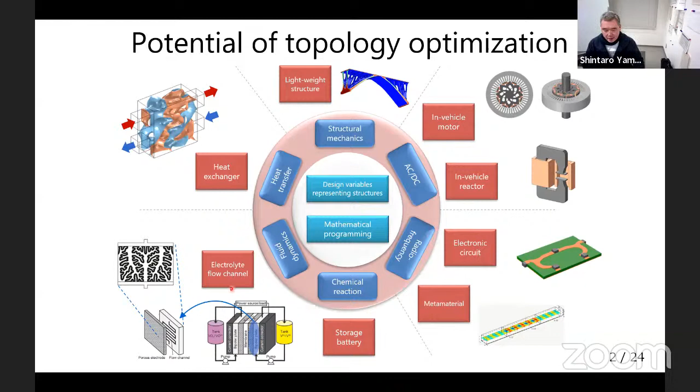My research is closely related to topology optimization. As you well know, topology optimization is a structural design methodology which can optimize both shape and topology with a high degree of design freedom. Because of the potential for generating high-performance structures, topology optimization is widely applied to various engineering problems as shown in this slide. For example, structural mechanics, low-frequency electromagnetics, high-frequency electromagnetics, chemical reaction, fluid dynamics, heat transfer, and so on.

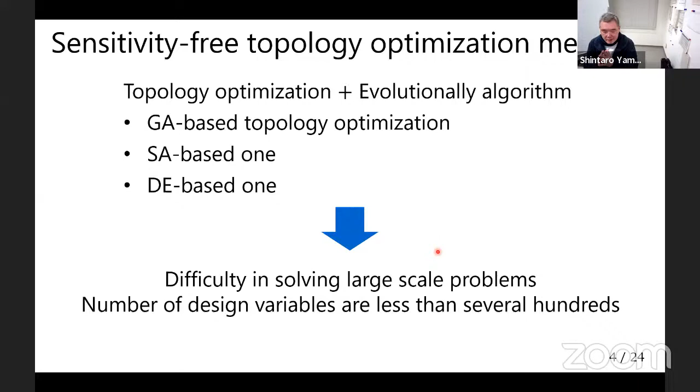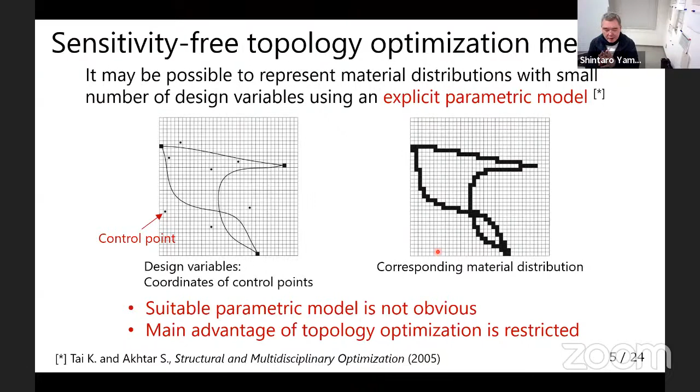There already exist some sensitivity-free topology optimization methods. Typically, evolutionary algorithms are incorporated into topology optimization. However, such methods have difficulty in solving large-scale problems. The number of design variables is usually less than several hundred. Of course, it may be possible to represent material distributions with a small number of design variables, incorporating an explicit parametric model. However, a suitable parametric model is not always obvious, and the main advantage of topology optimization, that is, high flexibility for representing material distributions, is restricted.

Therefore, the following 3 points are needed for strongly nonlinear problems. First, the sensitivity-free nature. Second, a small number of design variables. Third, a large degree of freedom for structural representation. These requirements seem to be contradictory. To satisfy all of the 3 points, I here propose a new structural design methodology called data-driven topology design. The key idea is utilizing a deep generative model.

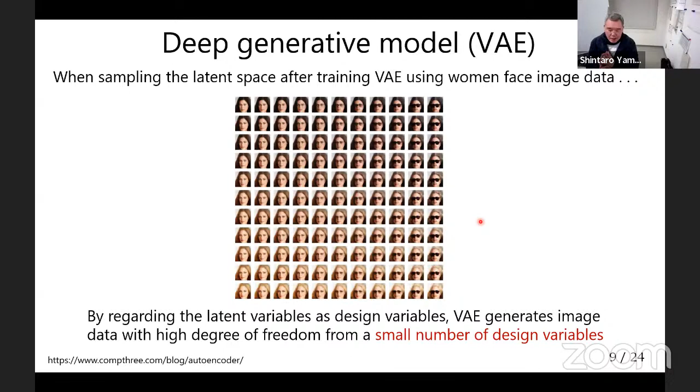Similarly, if I train a VAE using women's face image data, these images are generated by sampling the latent space. By regarding the latent variables as design variables, the VAE generates image data with a high degree of freedom from a small number of design variables.

Data-driven topology design has 3 important points. First, material distributions can be generated by random sampling in acceptable computational cost because the latent space is low-dimensional. Second, material distributions can be generated with large degree of freedoms, which are diverse and inherit features of training data. Third, it will be difficult to construct an explicit parametric model satisfying the above 2 points. However, such parametric models are implicitly constructed through the training by using deep generative models.

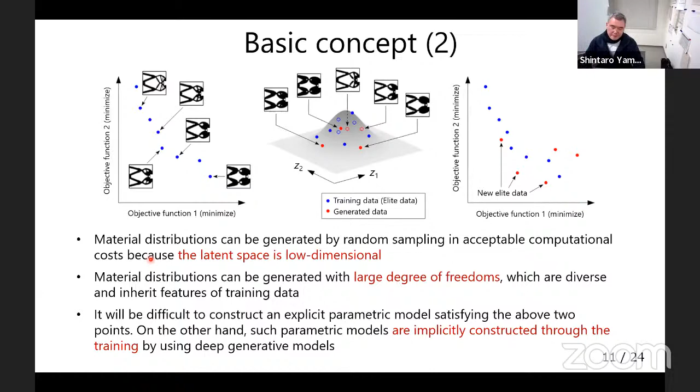In step 5, inversely convert material distributions of the generated data. And in step 6, evaluate performances of the generated data and update the elite data by merging the generated data. And go to step 2 of the next iteration. These steps are iterated until the convergence criteria is satisfied.

Here, it should be noticed that the initial data should be provided according to a certain strategy in data-driven topology design. In many evolutionary algorithms, initial data are provided using a random number generator. However, it cannot be used in data-driven topology design because deep generative models cannot capture meaningful features from randomly generated material distributions. Therefore, I need to provide initial data which are regular in a certain degree.

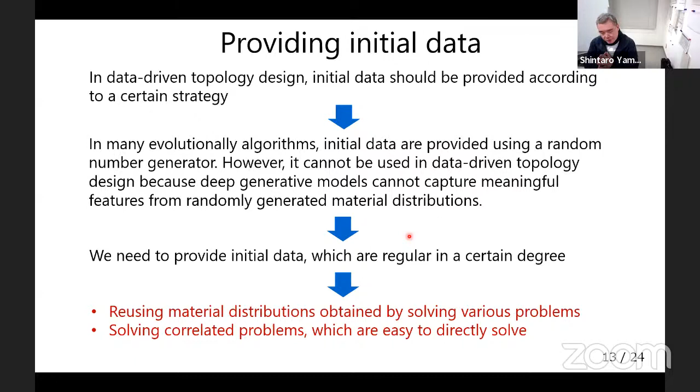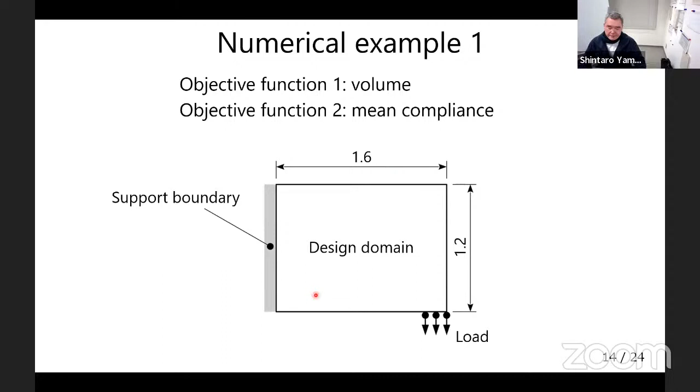Numerical example one is a well-studied mean compliance problem. That is, the objective functions are the volume and mean compliance. The design domain and boundary conditions are given as shown here. To set up the initial data, I construct a database that includes 2,271 material distributions obtained while solving various topology optimization problems. From this database, I select 55 material distributions according to the optimality of the two objective functions. These are material distributions of the initial elite data.

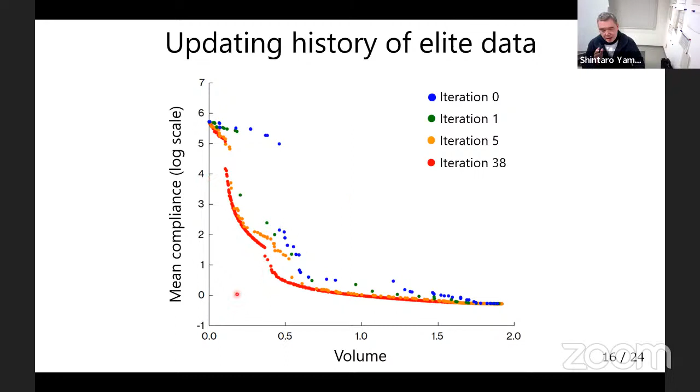Originally, compliant mechanism design problems are difficult to solve because linear strain assumption often fails due to large deformations. That is, the geometric nonlinearity should be taken into account. In addition, the maximum stress should be considered in the real-world design. However, it is usually difficult to solve minimax problems. Therefore, in many studies of topology optimization, the geometric nonlinearity is ignored, and the maximum stress is implicitly controlled by constraining the stiffness to the input load. Thus, the numerical example presented here is a difficult problem when solving with the sensitivity information.

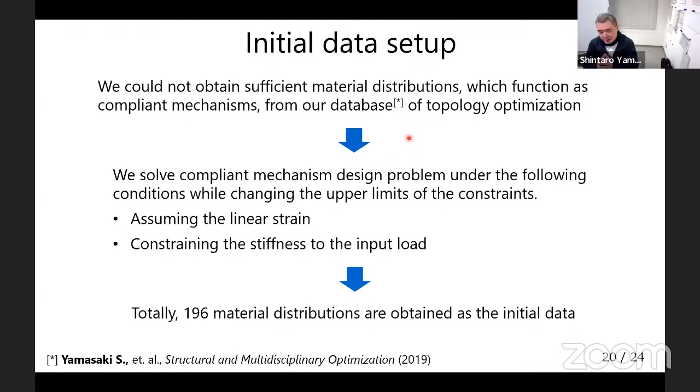Another issue is how to set up the initial data when solving the compliant mechanism design problem using data-driven topology design. In a preliminary study, I couldn't obtain sufficient material distributions which function as compliant mechanisms from my database of topology optimization. Therefore, I solve a compliant mechanism design problem which is simplified by assuming the linear strain and constraining the stiffness to the input load. And by changing the upper limits of the constraints, I obtained 196 material distributions as initial data. And the following 30 material distributions are obtained as initial data according to the optimality of the three objective functions.

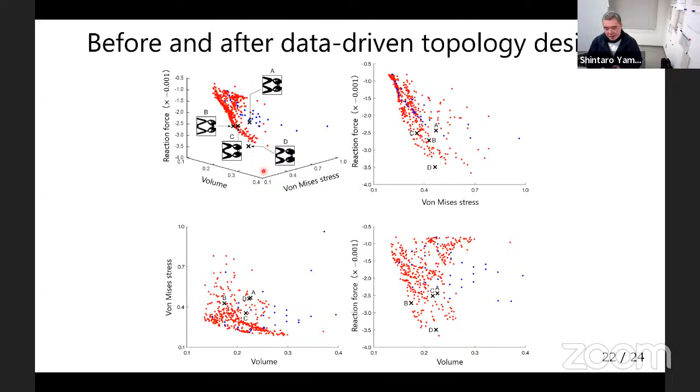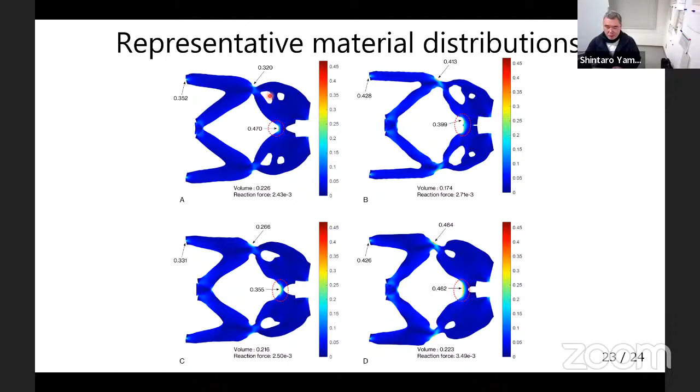As a conclusion, I propose a new structural design methodology called data-driven topology design for solving strongly nonlinear problems. It has the following features. First, material distributions with large degree of freedom are generated from a small number of design variables by using a generative model. Second, data-driven approach is adopted.

That is, training of the deep generative model by elite data and elite data generation by the trained deep generative model are performed iteratively. Third, by incorporating them, the performances of the finally obtained material distributions are drastically improved from initially provided material distributions. Finally, I confirmed usefulness of data-driven topology design through some numerical examples.

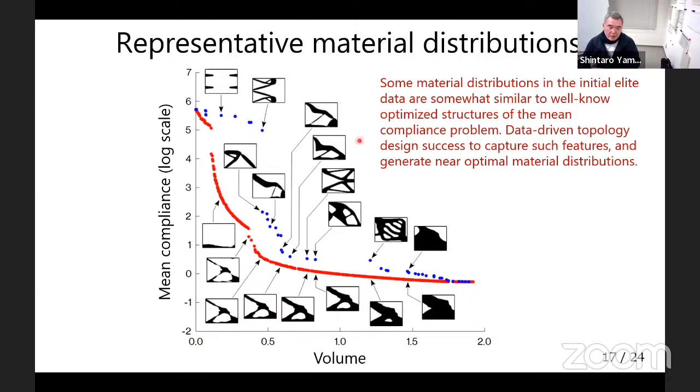Sorry, it is difficult to explain this mapping method precisely. Roughly speaking, I map material distribution in a strange design domain to the regularized domain by using the material distribution mapping method proposed in my previous paper. So please, let's discuss after this session about it.

Okay, thank you very much. So you have a question from Mr. Junji Tutu. What kind of deep learning model was used? Okay, you can give the answer on chat. What kind of deep learning model was used? Thank you for your question.

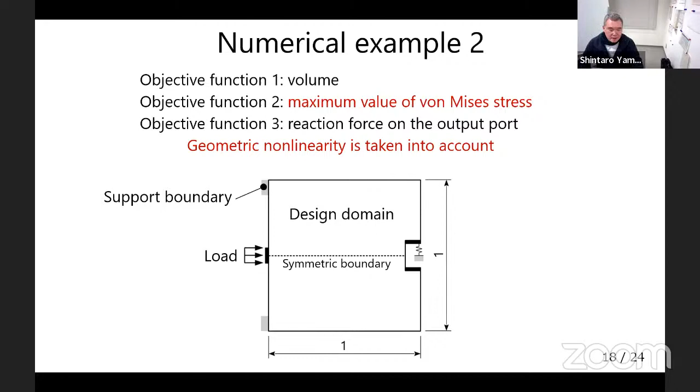I used a variational autoencoder in this presentation. Variational autoencoder is one of the generative models, and it is a type of unsupervised learning, where the data is used as input and output, and it learns and captures the features of training data in latent space.

So, could you understand? Many thanks. I got it. Okay. So if you have time, just send a message to him on chat. It's okay, Shintaro? Yeah, okay, thank you very much. Okay, thank you, Shintaro. So, let's move on to the second presentation.

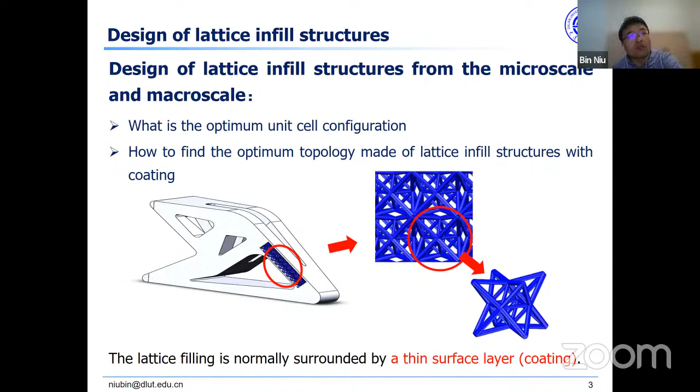So in this work, first we see the homogenization analysis of periodic lattice structures. There are many unit cells. We are not going to do detailed modeling and discrete analysis, as this is computationally costly. So we use equivalent analysis, which is important. We use the homogenization method, but here we use the novel implementation of asymptotic homogenization by Professor Gengdong Cheng. This is very easy, you can use it very simply, and we can get the equivalent properties.

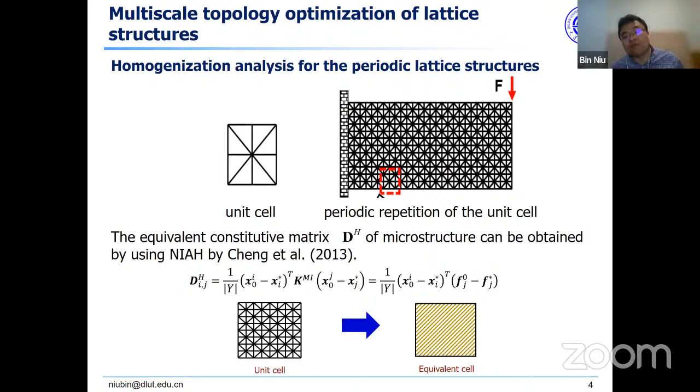Then with these equivalent properties, we can do multi-scale analysis of lattice structures, for static or dynamic analysis. The homogenization method can reduce the computational cost. This is the classical method. Then we continue with our earliest work on PAMP, porous anisotropic material with penalty. Then we can perform two-scale topology optimization, and we can find the optimum microstructures as shown here. We can also find the optimum distribution of this microstructure on the macro scale. We list some references about this. On the micro scale we use the classical method, and on the macro scale this is porous, anisotropic material. Then we can perform this two-scale optimization.

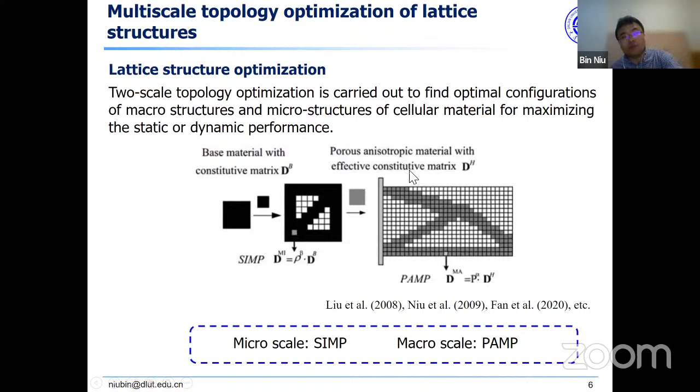And so on. How about this periodic infill with the coating? The coating is shown here. When you introduce the coating, the infill lattice is normally surrounded by a thin shell. So it is very interesting to design such a structure, with uniform microstructures, as I show here, but where the microstructure is coated by a thin shell. So we are going to do this.

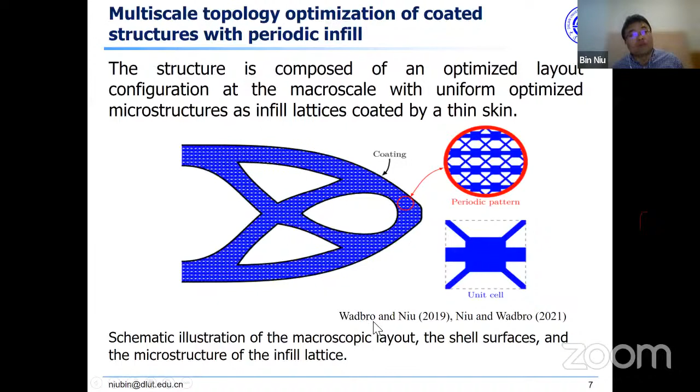Sorry, is there something? The multi-scale topology optimization of the infill lattice is built. From the figure, we can see the optimized macro structures and this optimized periodic microstructures. On the macro scale, together with this lattice field, we can also design the coating. So first of all, how to design the coating? The coating, this boundary coating, you will see varies with the change of the topology.

So therefore, it is very important to identify the coating together with the topological design of the microstructure. So we do it simultaneously. It's not separate. When we design the lattice, we also design this coating. This means we can change the thickness of the coating and the topology of the lattice changes. Then the coating is also changed together with the topology of the microstructures.

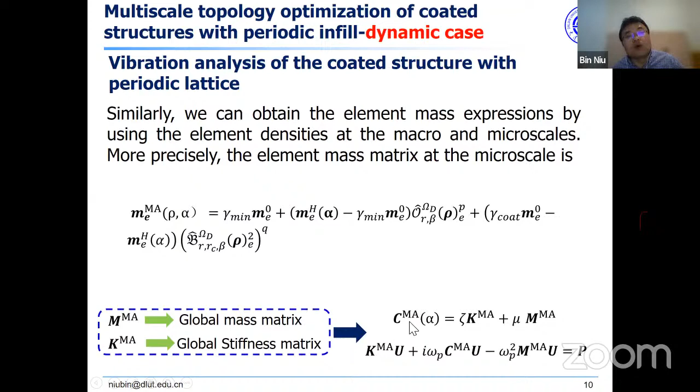Similarly, when we consider the dynamic problem, we can also build the element stiffness and element mass expressions by using the element densities at the macro scale and the micro scale. Furthermore, of course, we can build the dynamic equilibrium equation for the lattice infill structures. Then we use the damping model, Rayleigh damping. So here we are going to build the two-scale optimization formulation for the infill structure with the coating. I just show it here. This is the optimization formulation.

The objective for the static case is the compliance, which will be minimized. We also consider the dynamic compliance. Of course, we introduce some constraints. We have a volume constraint on the micro scale. And we also have a resource cost constraint on the macro scale, because we consider the coating and the lattice. We can assume a different cost for the coating and for the lattice, so we can have a cost constraint here. This is for the densities at the micro scale and the macro scale. As discussed above, we use the close operator to evaluate the material volume fractions on the micro scale.

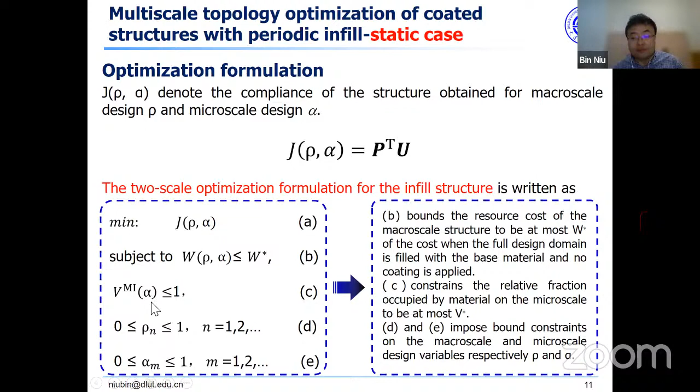This is for the static results. We consider two different problems, with different loads, on the corner and on the center. We call them TC1 and TC2. Let me show you some results. I see we already have 9 minutes. So here are the results, optimized for different thicknesses of the coating. The first row is for the optimized macro structures. And here we show the coatings with different thicknesses. These are 3x3 microstructures. Then this is for the center loading.

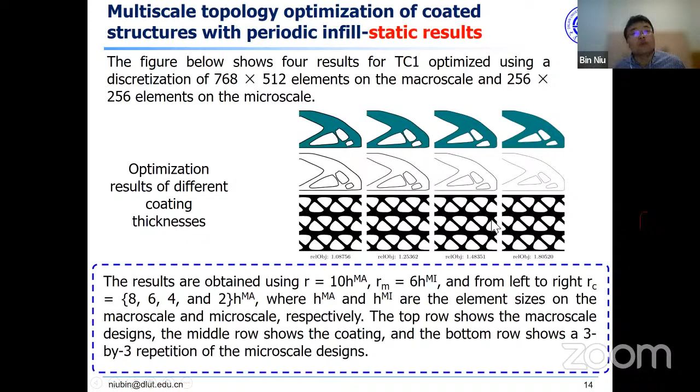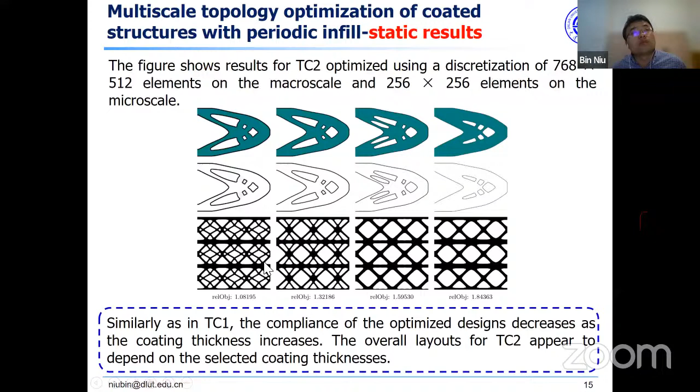Similarly, we have the optimized macro structure, the coating and the different thicknesses. You will see that with different thicknesses, the microstructure could be different. And here are also 3x3 microstructures. This is for the static case. For the dynamic case, we also have two examples. This is the center loading, and this is the MBB beam. We have the load over here.

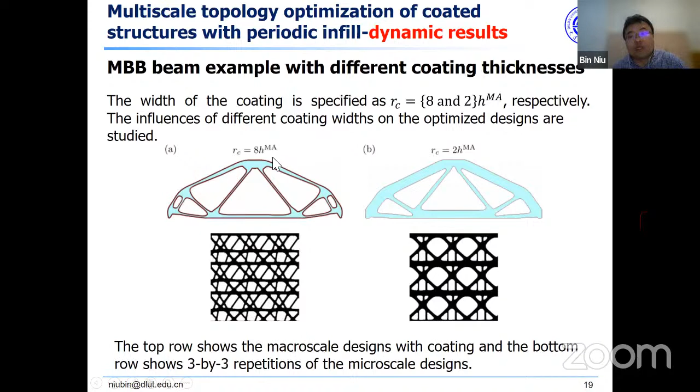So I have a summary of this work. We are working on this multi-scale optimization. We extend our previous work, and we consider coating together with the macro and the micro topologies, and we perform the optimization for the static and dynamic case. Of course, we also have some sensitivity analysis, but I'm not presenting it here due to the time limit.

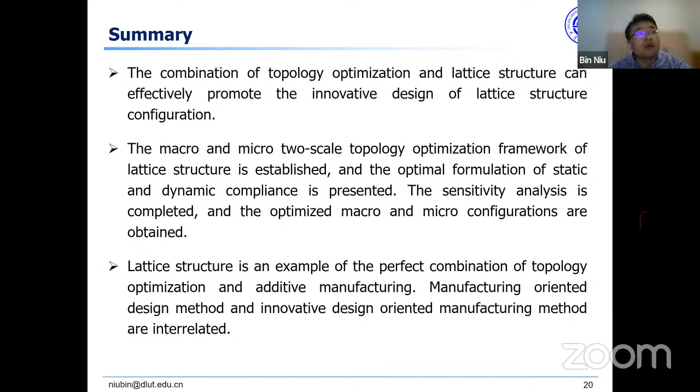So thank you, Bin, for your nice talk. Do you have any questions? Okay, Ole, I could have one. Happy New Year to all of the Chinese very soon. Thank you for your talk, Bin.

I was wondering, when you have the same microstructure everywhere, then it's like optimizing the microstructure for multiple different loading cases. And that would usually result in an almost isotropic microstructure. So looking at all your microstructures, they actually look quite isotropic. So I'm wondering if you have investigated how much different they are from simple isotropic microstructures. Of course, they have a little tendency to be stiffer in the horizontal direction because that's your loading, but really they look isotropic to me, all of them.

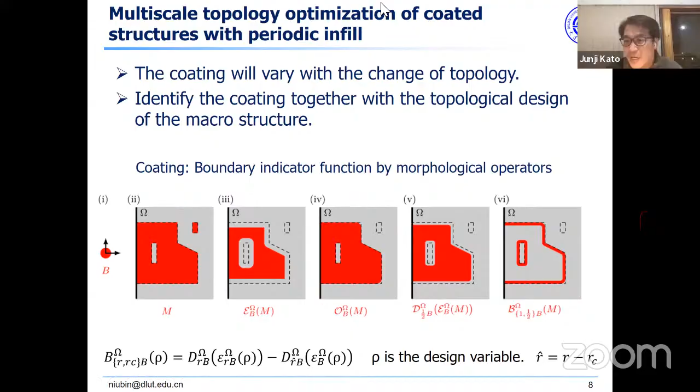Thank you. Or any other question? No question. So I have a simple question. Sorry, I have one simple question. When you apply coating on the surface, mechanically speaking, we will get a so-called confined effect. How do you consider such a very complicated mechanics in your finite element model?

That is my question. What do you say is confined? Confined effect. A wrapping type structure, for example, in a compression test with a wrapped coated structure and infill structure inside, the response is completely different. So the coating surface works very much to resist deformation in the lateral direction. This is the so-called confined effect, as far as I know. So I think this kind of effect should be considered in mechanics. This is my one question. The second question is very simple. What are your design variables, rho and alpha? Maybe you have two kinds of design variables, right?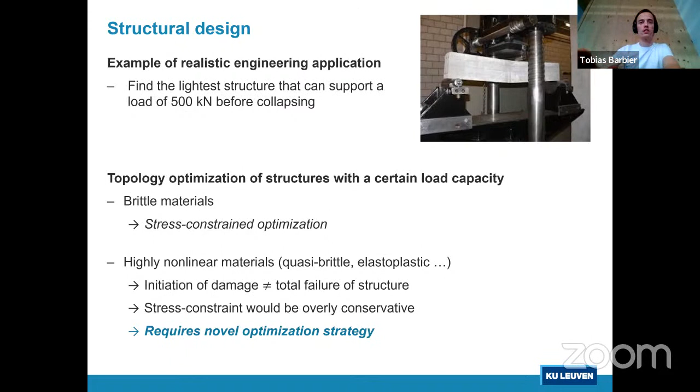However, if the material is highly nonlinear, the initiation of damage does not necessarily mean that the structure will fail completely. So if you have a simple stress constraint, it would be overly conservative, and therefore it requires a novel optimization strategy. For an example, we will consider an L bracket structure, which would withstand a design load of 500 kilonewtons. So first of all, the first question is, how can we calculate the load capacity of a structure if the behavior is quite nonlinear?

So we will consider a nonlinear model to simulate the effects of damage on a structure. And the model we use is a strain softening model where if a certain threshold of strain is reached in the material, the stiffness of the material will be reduced at that point. And then we will slowly increase the displacement of the structure and plot the corresponding load multiplier to obtain that displacement, to obtain a full load displacement curve, as you can see in the bottom right of this slide. And then we will assume that the maximal achieved load in this load displacement curve corresponds with the load capacity or the load resistance of the structure.

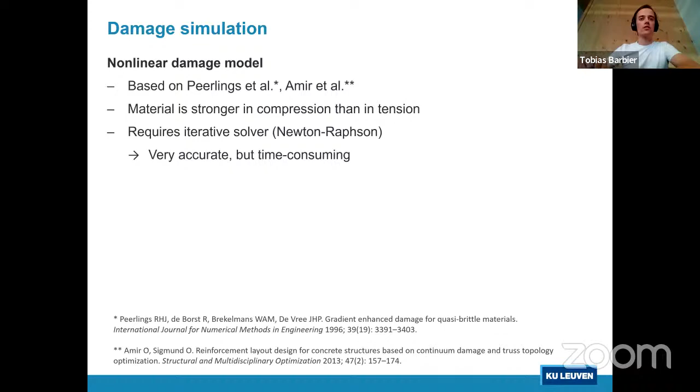The model we use is based on work by Peerlings and Amir, and it considers that the material is stronger in compression than in tension, such as, for example, with concrete or similar materials. And due to the nonlinear nature, we require an iterative solver, and we use a Newton-Raphson type solver for that. And this makes it a very accurate model, but also quite time-consuming due to the iterative nature.

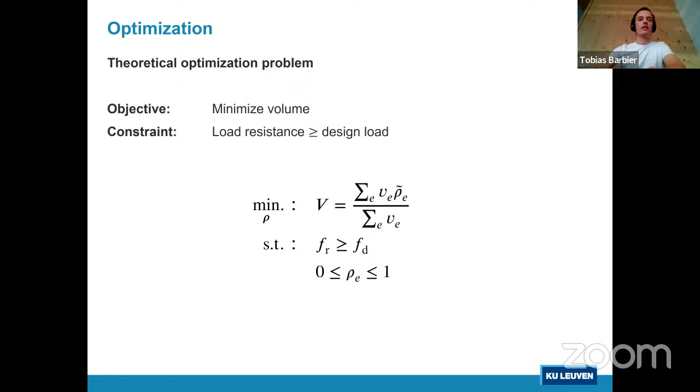So first, if you consider the theoretical optimization problem, we want to simply minimize the volume of a structure, but we want the load resistance, or the maximum load-bearing capacity of the structure, to be at least equal to or higher than the design load. If we consider, for example, an initial design and its load displacement curve, we could see that the load resistance for this design is higher than the design load, which is shown as a dotted green line. And if we see a possible optimal design, you could see that it's very likely that both the load and the displacement at which this maximal load is achieved have both shifted during the optimization. Therefore, it is not directly differentiable, and we will use an adaptive optimization strategy.

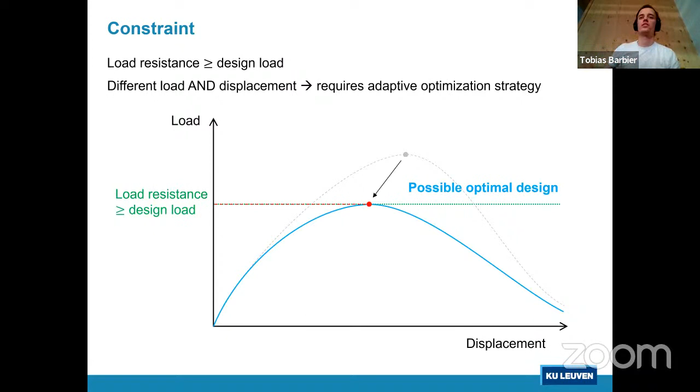So we start from the initial design for our method, and we look for the position of the peak in the load displacement curve. And at this position, we will temporarily fix this displacement, let's say, as an imposed displacement on the structure. And for this displacement, we will slightly reformulate the constraint. So we will now consider the load at the imposed displacement to be greater than or equal to the design load. So for that reformulated constraint, you can see after a few iterations that the load will start to converge with the design load. But as you can also see during this optimization, it's very possible that the shape of the load displacement curve leads to a shift in the position of the peak. And therefore, after a few iterations, we will adapt the displacement again to match the new position of the peak.

So for this new imposed displacement, we repeat the same process. So we minimize the volume with the constraint for the load at the imposed displacement. And this process is repeated a few times until convergence of the problem. And you see after a few times already that the difference between the displacement that you're optimizing for and the position of the peak is getting closer and closer together, which is also something we see in reality.

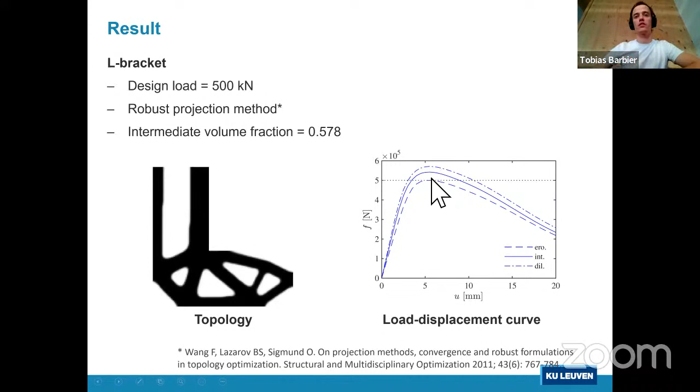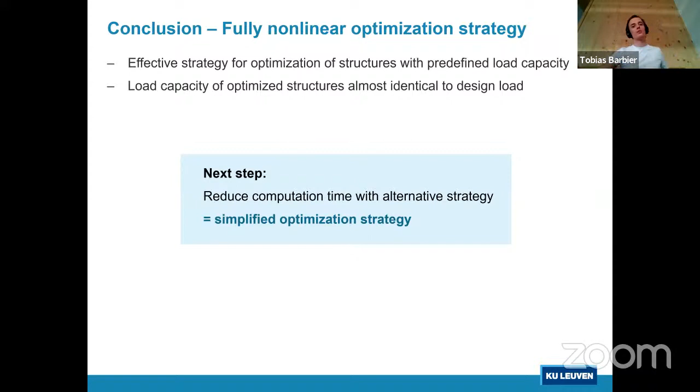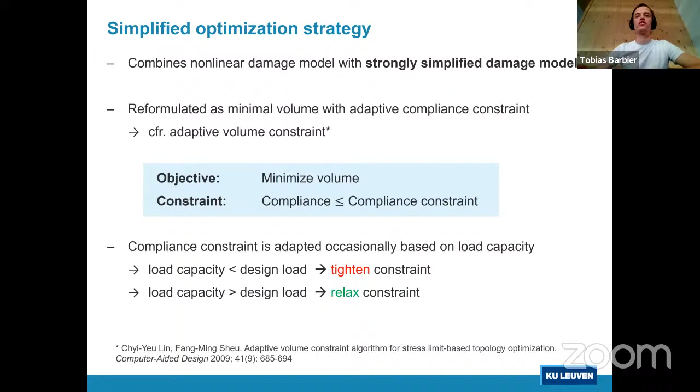But in the next step, we want to reduce the computation time with a second strategy, which we call the simplified optimization strategy. The difference here is that we combine the computationally expensive nonlinear model with a strongly simplified damage model. So we reformulate the problem as a minimal volume problem with an adaptive compliance constraint. So what do we mean with it? You could consider it as a very simple compliance constraint problem, but every few iterations, we will check the load capacity of the current design. And if it's too low, then we will tighten the compliance constraint. If it's too high, we can relax the compliance constraint. And by doing this adaptive scheme, after a few iterations, it should still lead to a design that satisfies the original constraint on the load capacity of the structure.

However, if we would consider just a purely elastic compliance, well, then we wouldn't have any measure of damage taken into account for the optimization. So therefore, we have come up with a concept of a compliance which considers first order effects of damage. How do we do that? Well, we start with a simple case where we apply the load and compute the elastic strain under this load. These strains can then be transformed into a damage distribution in the structure. And according to the level of damage in every element, the stiffness of these elements is reduced accordingly. And for this damaged structure with the reduced stiffness, we can compute the compliance under the original load. This is a compliance which is higher than the purely elastic one due to the arising damage in the structure. But it's only a single step computation for the damage, so it's computationally more efficient than a complete nonlinear analysis.

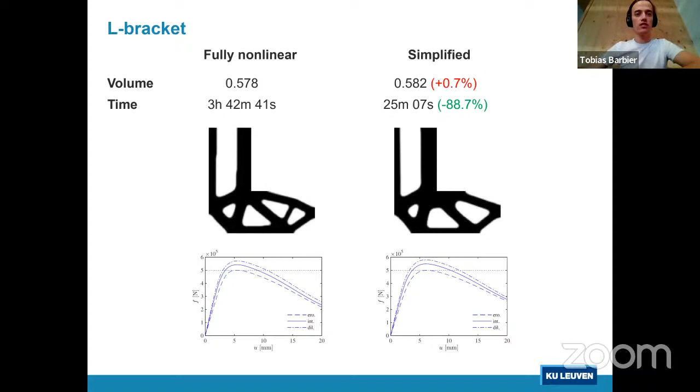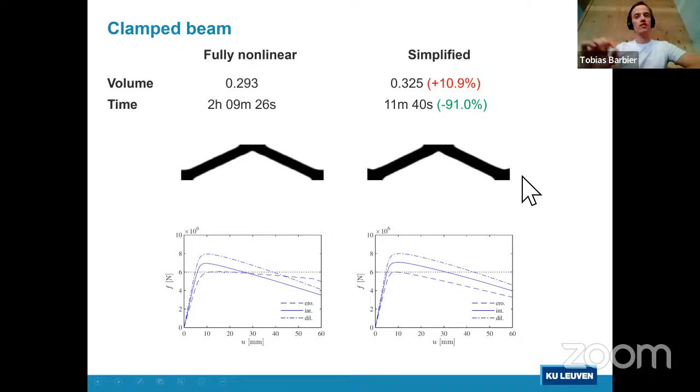So for this simplified method, we see that there's a slight increase in the required material volume, which is due to the strong simplification of the material model. But you can see that it's also approximately 10 times faster in computation time. And the constraint is also perfectly satisfied in this case. For the second example, there's a slightly higher increase in material that's required. We see that it's roughly 10% higher, but the topology is almost identical, just a little bit thicker. And again, it's roughly 10 times faster. So to conclude, for the simplified optimization strategy, we see that it's also effective for the optimization of structures with a predefined load capacity. And again, the load capacity is almost identical to the design load.

And if we compare both optimization strategies, we see that the simplified strategy is 8 to 18 times faster, depending on the case that we considered. But it also requires more material due to the simplifications that we did. And in future work, we want to expand this methodology to the optimization of more realistic three-dimensional reinforced concrete structures, for example, rib floors with certain rib patterns.

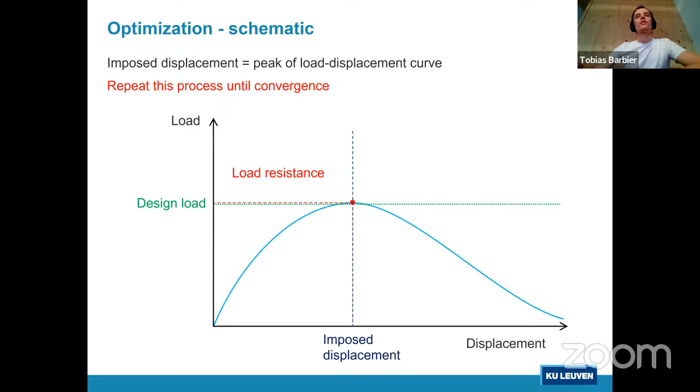So it is something that we considered, but due to the relative intuitivity of the adaptive method and the fact that it was converging to something very similar to what we hoped to achieve, we didn't consider the option anymore to have an even more expensive strategy. But in theory, you could do it, just depending on the amount of computation time you have available. Okay, yeah, makes sense. Thanks.

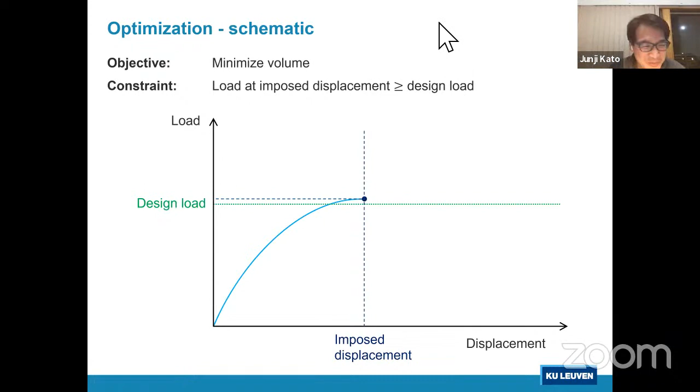Okay, thank you very much for your presentation. So time is coming. Thank you very much for your very interesting, impressive talk. Okay, so we should move on to the fourth presentation. So Professor Xiaoping Qian, University of Wisconsin Madison, USA. The title is On the Fly Dual Reduction for Time-Dependent Topology Optimization. So please, Xiaoping.

Thank you, Professor Kato, for inviting me for the presentation, and thanks to the webinar organizers. So this work was mostly done in 2020, where I had my sabbatical and could not go anywhere because of COVID. So I decided to do some work. Data-driven topology optimization is becoming popular. So I thought, what can we use data-driven methods to do? One of the challenges with topology optimization is the large design space. It makes it challenging to develop a reduced order model, which would require an enormous number of samples. So we thought on the fly is an interesting idea. That's what we decided to study.

The idea of dual reduction is basically using on-the-fly reduction for both the primal equation and the adjoint equation. This is why we're interested in time-dependent topology optimization. I thought transient physical phenomena are quite common, from flow to heat transfer to elastodynamics. And oftentimes the design optimized for transient response depends on the time duration. For the bottom, if you want to minimize strain energy, depending on the duration, the design could be quite different. So it's important to account for time. One other reason we're interested in time-dependent topology optimization is that it seems to pose a particular challenge in terms of computational expense.

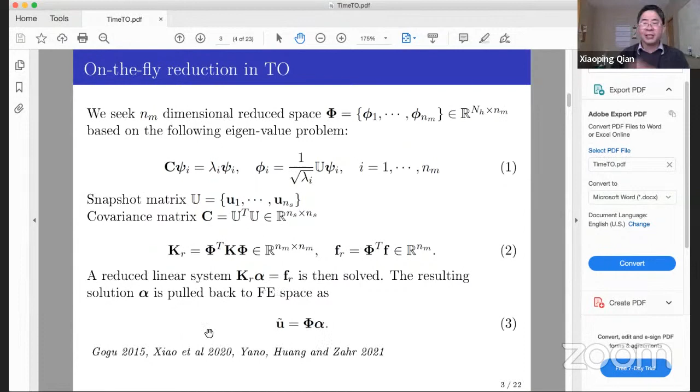Then how do we do sensitivity analysis for the reduced model? I use a minimum compliance example. Everyone knows this sensitivity. This is for the reduced order model. We can use adjoint analysis. There's actually a paper by Amir and Bendsoe, etc. They study this analysis.

Then Gogu and Xiao also follow similar analysis. So these are the basic sensitivity equations, where you have to form a Lagrangian. This is a cost function. You have to form this reduced system you solve here, and this constraint where the basis, which is from the snapshot matrix U, is an enforced constraint. You use the adjoint equation to solve this one.

So this equation you have to solve many times, depending on the number of bases you use, as well as whenever this ROM is invoked, you have a new alpha, you have to solve this one. So for the papers I've seen on the fly, they simply ignore this term. They just ignore this adjoint sensitivity. They simply use this term. So what is the accuracy and convergence implication? It is not clear. But if you look at this equation, it seems to make sense compared with the original one.

If you take a view, you simply approximate the full order solution U with a reduced order solution. But here we get this equation because it's a self-adjoint problem, where the adjoint variable V just so happens to be U, so you get this thing. So that's the basis of our approach. That is, what if we use dual reduction? We solve the adjoint equation independently, and then we can bypass this inconsistent sensitivity issue. So that's the idea of our dual reduction.

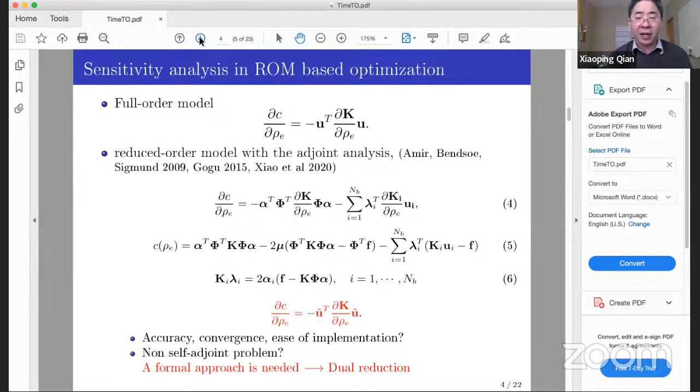So I use the example, elastodynamics with Rayleigh damping. So this is displacement U, stress, prescribed initial boundary condition, and a boundary condition here. And for minimum dynamic compliance, we can use the Lagrangian method to derive this adjoint equation. Instead of displacement U, we have adjoint displacement V. If you compare this adjoint equation with this primary elastodynamic equation, they are almost the same, except the negative becomes positive, and the initial boundary condition becomes a final condition. So instead of an initial boundary value problem, we're solving a final boundary value problem. But the equations are similar.

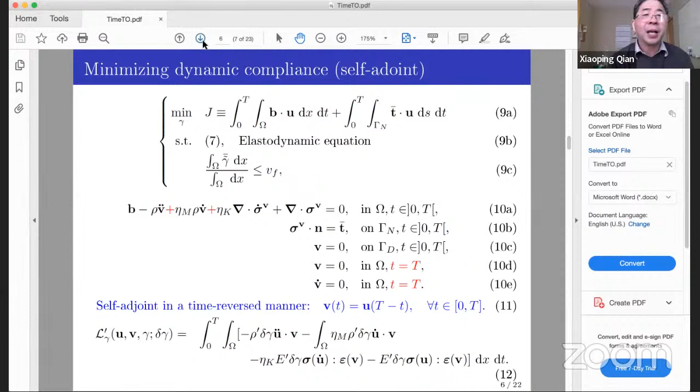Essentially, it's self-adjoint in a time reversed manner. So the adjoint variable at time t equals the primary variable at T minus t. And then we can obtain this adjoint without solving it. So we can have this sensitivity. But for other problems, such as mean strain energy, the adjoint is not self-adjoint to the primary equation. Then we would have to solve this one explicitly. So here we can solve the adjoint equation, it's a final value problem, and get the sensitivity.

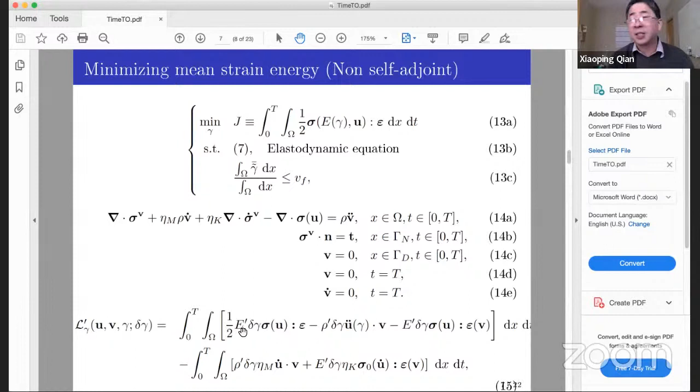Now let's get into details. How do we choose the snapshot strategy? This is actually important. We invoke two strategies. One is residue based. Whenever the equation residue is larger than the threshold, we just add it, invoking the full order solution. So for example, here after the first four solutions, we use those as the basis. So the error is actually smaller than the prescribed threshold. So this is the optimization iteration. Then we update the snapshot matrix, kicking off the earliest snapshot. Then the error becomes smaller again. When it's larger, we update it. This seems to work for the minimum compliance problem.

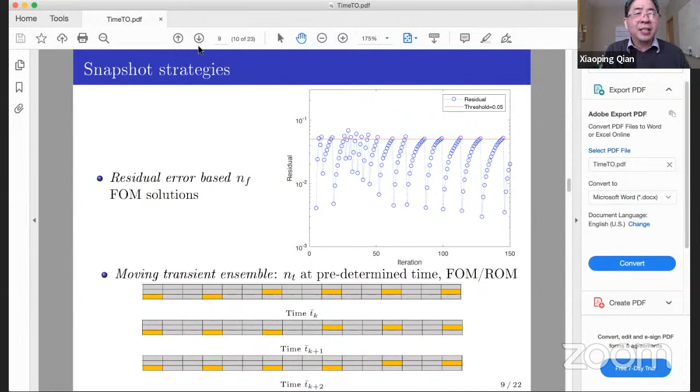The other thing that turned out to be very important is how we choose the threshold. Because in order to improve the convergence and the approximation accuracy, we want the error threshold to be as small as possible. When the error threshold approaches 0, we're essentially solving the full order model. There's no difference between our approach and solving the full order model. But that's not efficient. We're not saving any computation. In order to improve efficiency, we have to make the error threshold as large as possible, so perhaps all the full order model solves can be skipped. But that will pose a convergence issue.

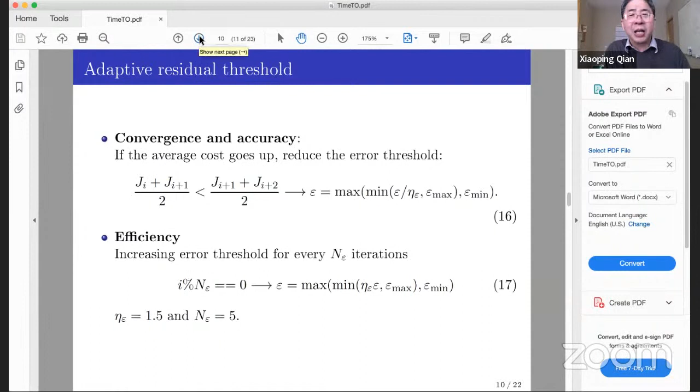So what we did is adapt the residual threshold. We monitor the cost using a moving average. If the average cost is going up, we reduce the error threshold, because it basically poses a convergence issue. Then if we keep reducing the error threshold, we're not reducing anything. So we increase the threshold every few iterations. That's a balance here, and this is the number we choose. With that introduction, let me show you the examples we have.

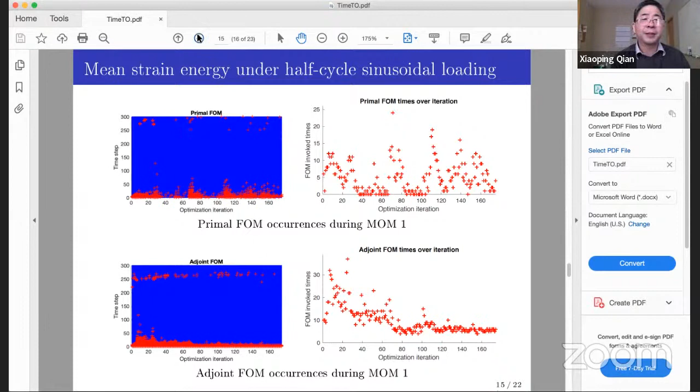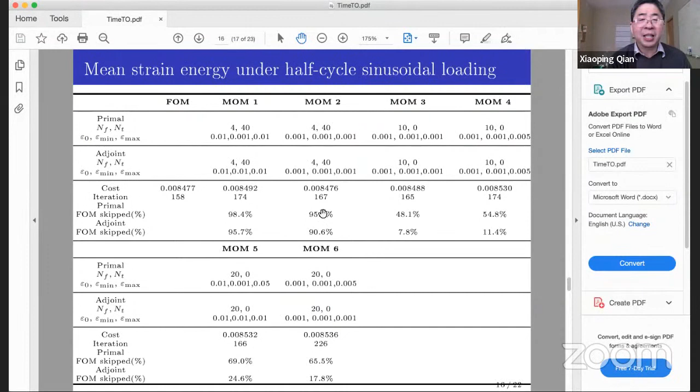And then here you can see why we need to sample snapshots over the transient domain. If I increase the full order model solves from 4 to 10 or even 20 without sampling snapshots over the time domain, the reduction is only 7%, 11%. That is not a very good reduction. If I increase to 40, then this becomes 95% and 90% for the primary equation and the adjoint equation.

And you can see, looking at time steps here, the skip ratio: when the time duration is very small, which is 100 time steps of 0.02 duration, we only get 50% for the primary equation. For the adjoint equation, we have 11%. That's not a great reduction. But if I increase to 2,000 time steps for duration of 0.5, then they both increase to 96% and 98% reduction.

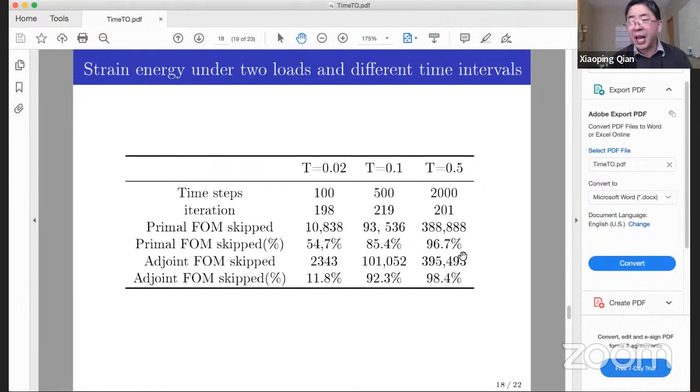Then I say, let's see if we can do a 3D problem. We're still using the same full order model and sample the time domain over 40 times. We solve this one, and we get a 99% skip ratio for the primary equation, 96% for the adjoint equation. To store this full order solution, 1 time step is 23.6 meg. If I have to do 200 time steps, that's basically 4.7 gig.

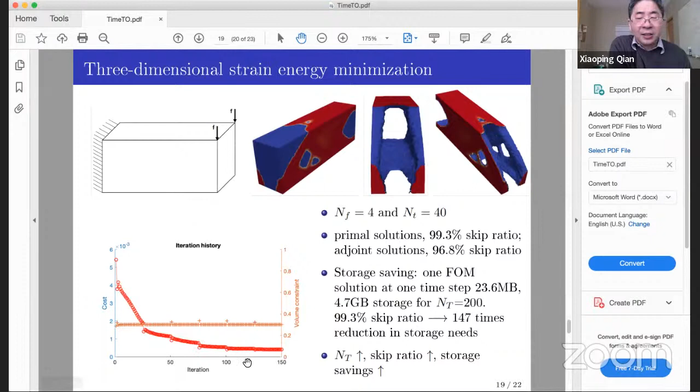So let me summarize the talk. We introduced a method on the fly. We extended this method on the fly to dual reduction. We introduced 2 snapshot strategies, residual error-based and a moving transient ensemble. We're using reduction for both the primary equation and a continuous adjoint equation. They are reduced independently. Adaptive residual appears to be key to efficiency in the convergence. We've shown that substantial savings of over 2 orders of magnitude can be achieved for both computation and storage. I think this opens the door for time-dependent topology optimization in 3D.

Now, looking to the future, this just shows that on-the-fly dual reduction can be quite helpful, but the residual selection appears to be the key. If it's inappropriate, you will see we're not converging, or there will be very little reduction efficiency. The other issue is that our reduced order model-based optimized designs are sometimes different from the full order model-based designs. This can be an issue. Then we have played with 2 snapshot strategies. It is not at all clear whether they are optimal or the best ones. So I think there's more work that can formally be done to study this.

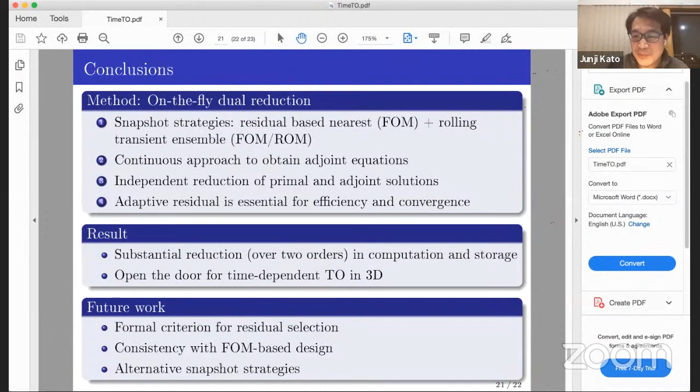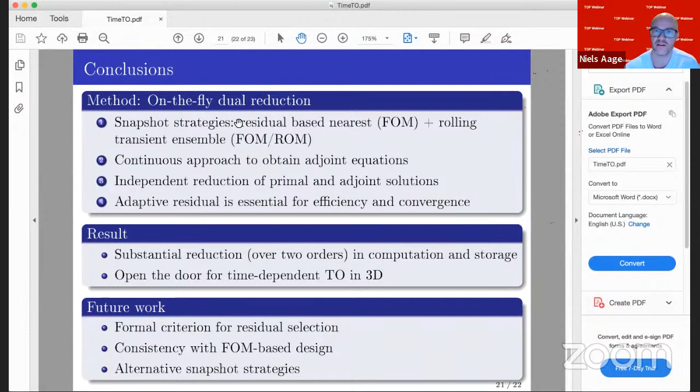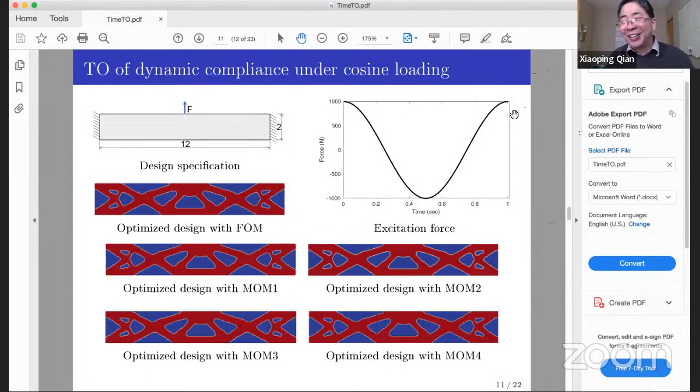Have you tried that? Chaotic, we have tried everything we presented here. Perhaps I'm not sure I can answer your question about truly chaotic. I'm wondering if this can represent chaotic or time loading you have not seen before. Anything more than that, I cannot answer. Perhaps ideally, you want to see this with even higher frequency and more oscillation. That's a good question. We have not done that. But we're not claiming this reduction can be done for all types of problems. No, but I agree. I just would like to see the limits. How far can you push it? Because this looks very promising. So I would love to see you do that.

Thank you. Good point. I had a related comment. I also liked it very much, Xiaoping, but your designs seem fairly static. So I'm wondering if you are at all approaching the first eigenfrequency, or what would happen if you actually approached the first or even the second, if conclusions would change.

I did not play with that problem, but I'm not surprised that a two-order magnitude reduction cannot be achieved for all types of problems. Does that answer the question? Yeah, I guess. If the eigenvalue model problems are not reducible, then this one cannot be solved.

For example, for convection dominant problems, we know the POD Galerkin method is not conducive. In that case, we're not expecting to see the reduction. If it can be reduced, I think this approach can be.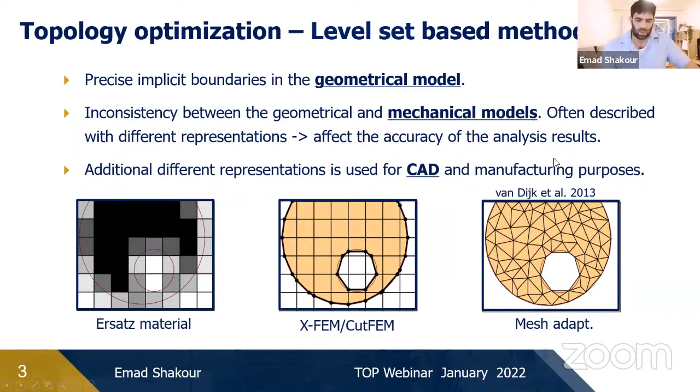In order to move from one model to another, we usually use some approximation techniques with different levels of accuracies. What we suggest differently is to consider the level set-based topology only as an auxiliary topology in order to build a more sophisticated topology.

And by sophisticated topology, I mean topology that complies with our requirements. In our case, we sought a final topology that has a unified representation for the three models: geometrical, mechanical, and CAD model, and that has a precise and explicit boundary representation. We believe that it could considerably contribute to the accuracy of evaluating the structural interaction or responses near or along the structural boundaries.

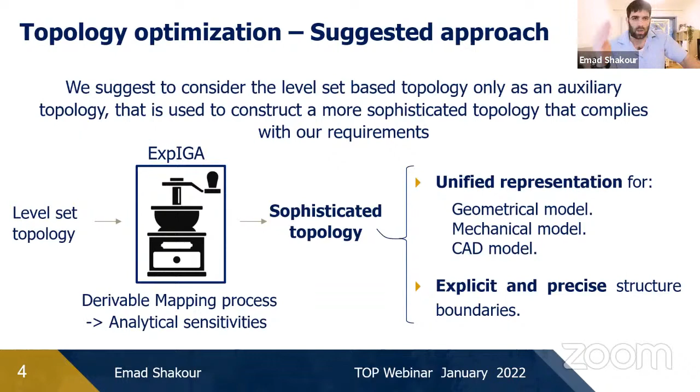One of the reasons is that if we have a unified model, it eliminates the transition stages between the models, which are usually performed using approximation techniques. Furthermore, the mapping to the sophisticated topology that we suggest is based on untrimming techniques, and it is a derivable process, which we believe is important since it allows us to compute analytical sensitivities for the entire optimization procedure.

This approach was first published a year ago under the title Topology Optimization with Precise Evolving Boundaries based on IGA, isogeometric analysis, and untrimming techniques. In this paper, we solved minimum compliance and minimum stress problems with volume constraints, and we showed the ability of this approach to provide smooth stresses along the boundaries. We also incorporated some useful techniques and applications such as fixed void regions embedded in the domain, topological derivatives, and something from the CAD world, which is called the control point mapping procedure.

I invite you to look at this paper. Of course, you are interested. I know that it's not the paper we're talking about now. We're talking about the second paper on this topic, which we will see in the next slides.

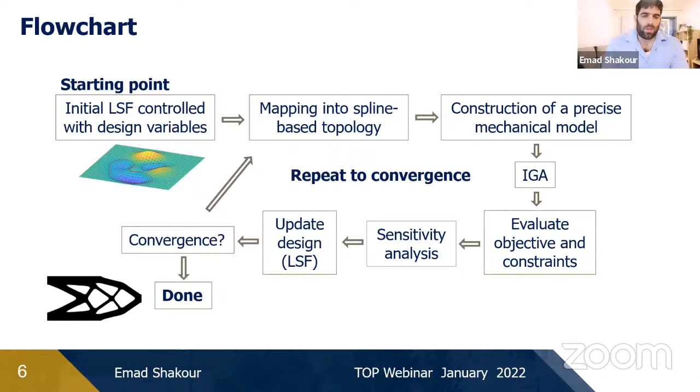Here we can see a flow chart which briefly describes the optimization process. First, we start by defining the level set function. Afterwards, we transform the topology we get from the level set function into a spline-based topology, which is defined over an unstructured mesh. Then, using the same topology representation, we perform isogeometric analysis on the exact structure geometry. Afterwards, we continue with the normal process of computing sensitivities and updating the design, and we repeat this process until we reach convergence.

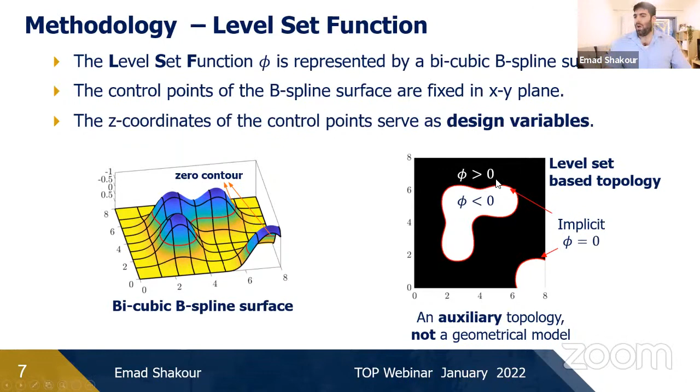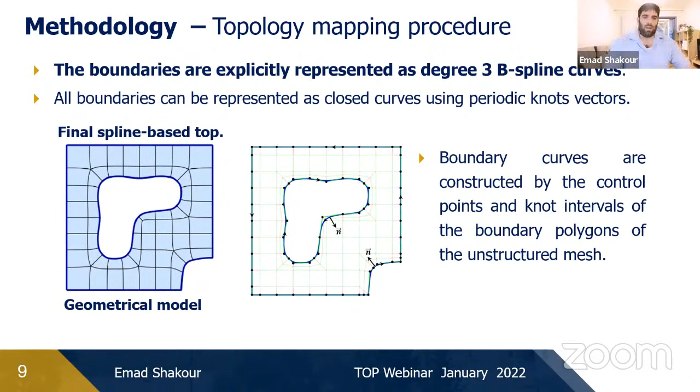Okay, in this slide, I just wanted to say that the boundaries here, according to our approach, are defined as degree 3 B-spline curves. So at the end, we've got geometry which has a crisp separation between the material phases and between the void and the material regions. And this separation is explicitly defined as degree 3 B-spline curves, cubic B-spline curves.

Finally, one of the main advantages of this approach is that with some modification, we can perform the analysis on the exact geometry of the structure. We don't have to build an approximated mechanical model, and we do that by performing 2 h-refinement levels to the elements in the domain, in order to comply with some analysis suitability conditions. And in order to increase the quality of the mesh, we perform Laplacian smoothing to all the control points in the domain.

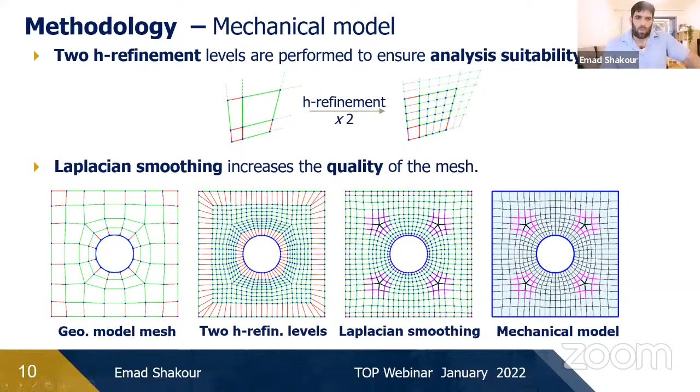Now we can briefly discuss the continuity of this model. If we look, for example, at an extraordinary point on the rightmost figure, the red lines would be C0 continuous in the solution field. We will have C1 continuity along the grid lines and C2 continuity elsewhere.

And also, I should say that the extraordinary points are at least 4 patches away from the boundaries. This means that the discontinuity lines near the extraordinary points don't affect the continuity of the boundaries. And the boundaries will remain C2 continuous, as the cubic B-splines which define them. And C2 continuity in the solution field, in our case, we're solving to find the displacement field.

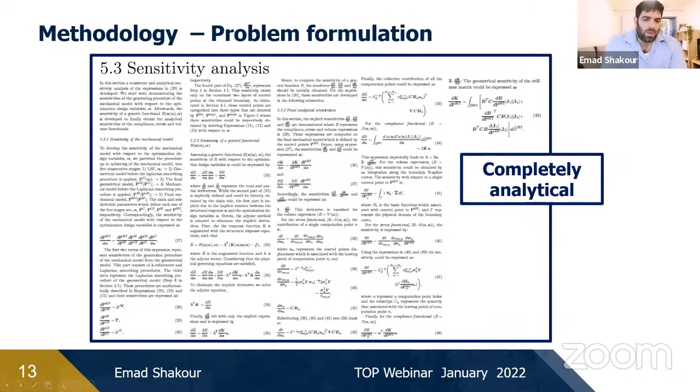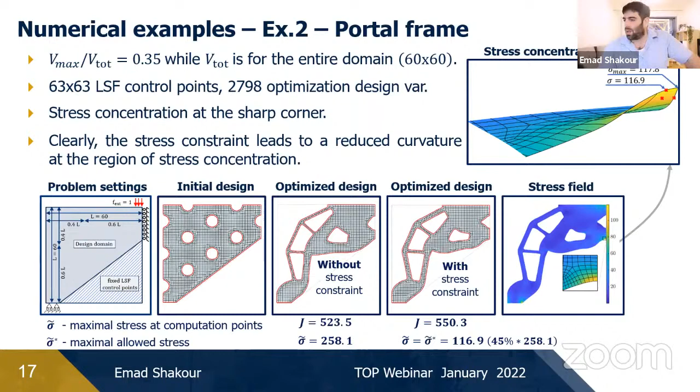Here we see another example of a portal frame structure, and we have the same concept, the same explanation for the stress results at the stress concentration region. And of course, the results of the optimization, as we can see, are reasonable, and smooth stresses are obtained at the stress concentration region. Third and last example, which is not characterized by stress concentration.

To conclude, I presented stress constraint topology optimization, which is solved with a unified geometrical, mechanical, and CAD model. Our approach can provide designs with smooth, precise, and explicitly defined structure boundaries throughout the entire optimization procedure, not only the last optimized design. And in addition to the stress computation in the interior of the domain, we can also limit the stresses at computation points which are precisely located along the boundaries.

We have C2 continuity of the solution fields. In our case, as I said, it's a displacement field. Therefore, the stresses near the boundaries will be C1 continuous. And we have shown a comparison with the C0 finite elements.

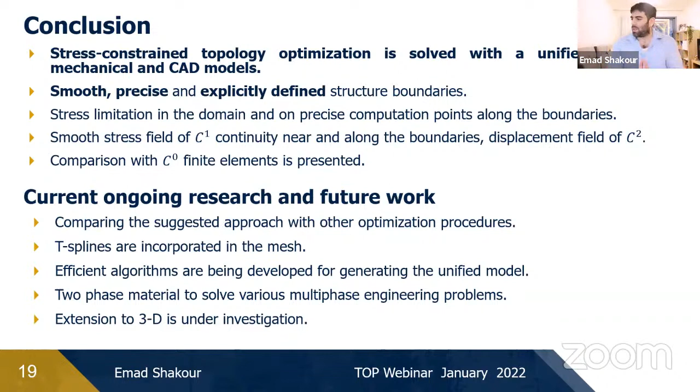As future work and current ongoing research, we are trying to compare our approach with other optimization approaches, to compare the entire optimization procedure and not only the analysis. T-splines are incorporated in the mesh, in order to reduce the computational effort and the degrees of freedom. Efficient algorithms are being developed for generating the unified model. We are trying to make our algorithms more efficient, and we are developing our approach to deal with two-phase material problems in order to solve various multi-phase engineering problems, and extensions to 3D are under investigation.

The results I've presented here were published a few days ago in the Structural and Multidisciplinary Optimization journal, and the title is Stress Constraint Topology Optimization with Precise and Explicit Geometric Boundaries. Thank you for your attention.

Thank you very much for your presentation, Emad. So do you have any questions? The time is over, so we ask for a very short question.

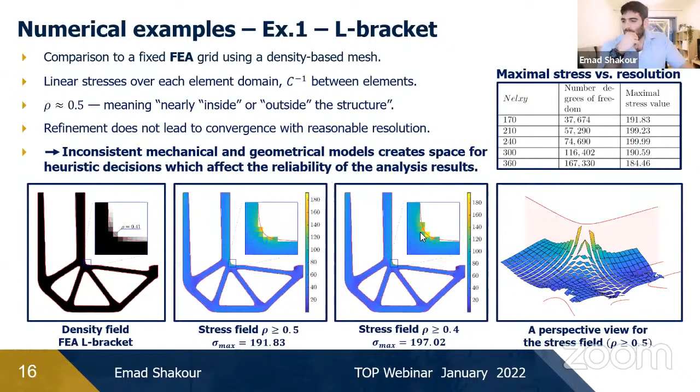What is a mechanical model? The mechanical model is the model we use for the analysis, the model where we perform the integration, where we compute, for example, in this case, the stiffness matrix. So was that the isogeometric analysis you did? Yes, it is isogeometric analysis.

So what is the CAD model, what's the role of the CAD model then? Is it usually the same thing? No, it's not the same thing. In isogeometric analysis, the mechanical model and the CAD model use the same representation, so we could say that they are the same. Yes, and that's why we use isogeometric analysis, in order to unify the three models: geometry, mechanical, and CAD model.

So you can say it's only two models then. It's only one model that describes three things: the geometry, the mechanical model, and the CAD model, which could be embedded into CAD routines and codes, because it is represented by the same language, the language of splines.